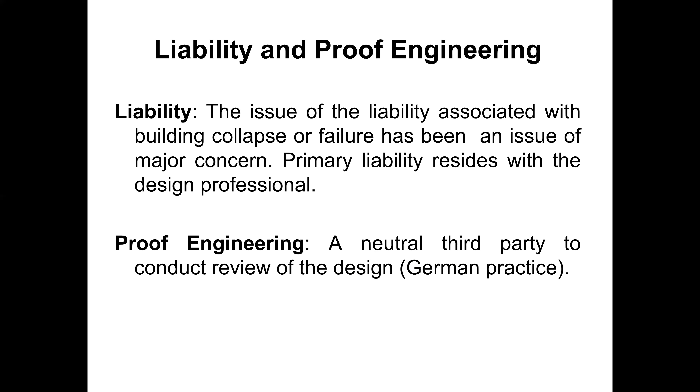Moving forward, the next heading in the book is project concept and need, or project development. We start civil engineering projects if there is a need. After the need, we prepare the conceptual design, the model or architectural design. The conceptual design should be ready, agreed and approved. Then we move forward with the preliminary or detailed design of elements.

First we should agree on the architectural design: if it's a high-rise building, how many stories, say an 80-story building, how it looks, whether it's a concrete or steel structure. If it's a bridge or interchange, how it will look, whether it's a box structure or I-girders. The main things should be decided. Once we have approval of the conceptual design, we start the detailed, final design.

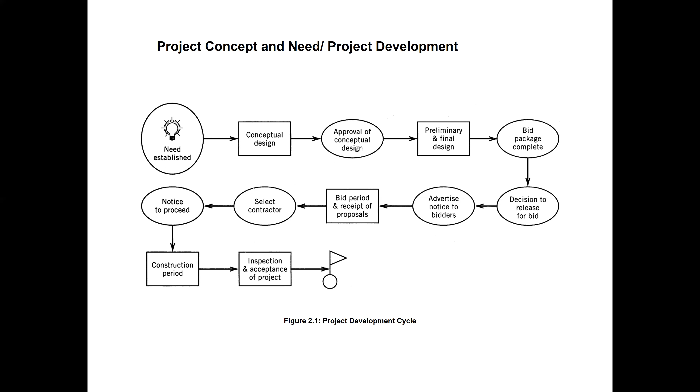This is like a project concept and need and project development cycle. Okay, so we will move forward with the next slide. So now this is the definition they have put for the drawings.

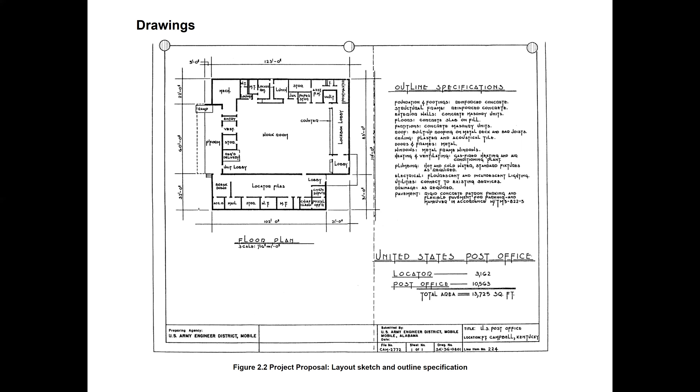So here, you have studied the courses AutoCAD and drawing, so you are familiar with the drawing. This is just a sample of a layout sketch and outline specification on a drawing. Okay, so you are familiar with the drawings. Next is the estimate. On the estimate, we will study a separate chapter on estimation.

But here is just to give you some idea: an estimate is a calculation of the quantities of work and their expenses. The total probable expenses to be incurred on the work is known as estimated cost of the work. The estimated cost is a close approximation of its actual cost. So we prepare the project estimate.

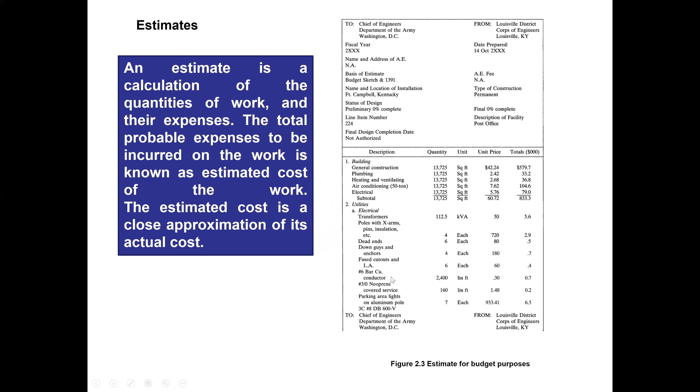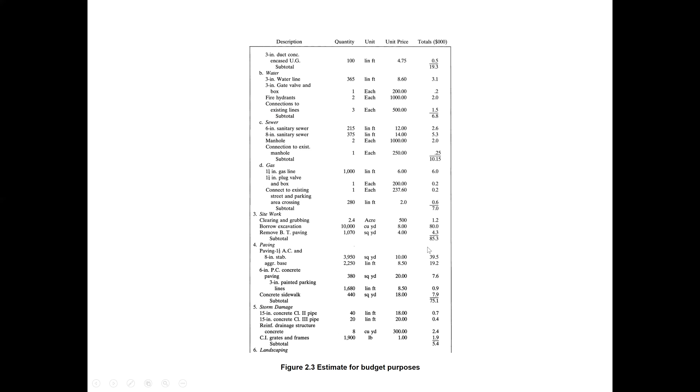So usually we have serial number and item description, and we take out the quantity takeoff. So how much quantity for each, what are the units for each quantity, and then how much is the unit price and total price. Here you have utilities, cost for sewer, for gas, for site work, for paving, for concrete work, for landscaping. This is description, quantity, unit price, and total price.

Communication. There is a design related cost. So this is just to let you know about the bill of quantities or the estimate. Inshallah there will be another separate chapter in which we will prepare an estimate in detail, so you will understand. But here it is just to let you understand that there is an estimate. This is approximate. For every project we will prepare the estimate.

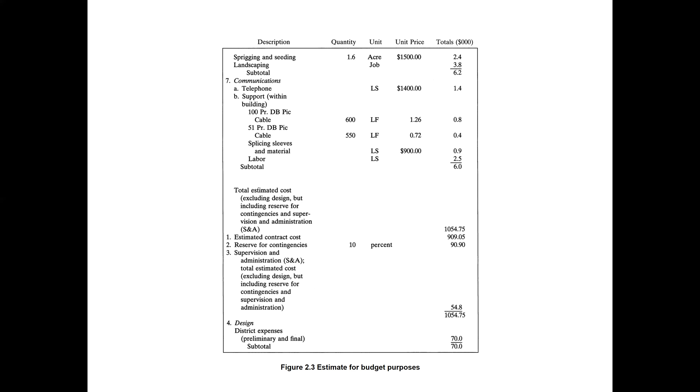There are different types of estimate, but this you can say is the bidding estimate for the project. The contractors, when they submit the bid, prepare this estimate and the total price of the project. When they put the unit price and total price, they add up at the end and get the project price. So in the next slide they put notice to bidders.

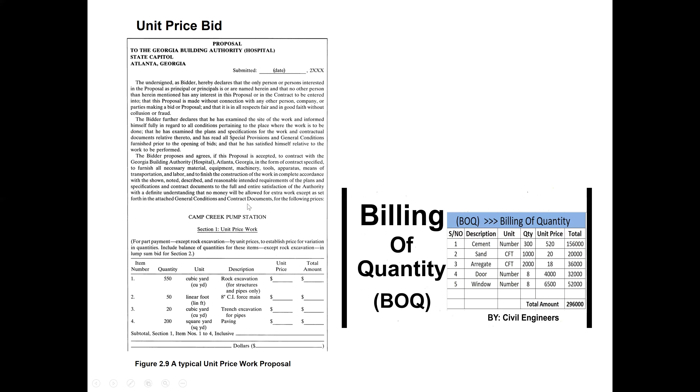So the unit price is given, then multiply the unit price with the quantity to get the total price, and then add up all the totals and it becomes the project cost. By this way, we are going to have the bid price. So let's move forward and come back to the bid package. We are going to discuss general conditions.

So general conditions define each contracting party's duties and rights, and the rules by which they are to meet obligations and perform the work they agreed upon. Okay. General conditions is like a book; some people call it the Bible. It's a book that we will follow for any time extension, anything in the project.

We will have to go back to the general conditions and supplementary conditions to see what the contract says, in case of conflict, increase in time, increase in prices or change in contract documents. For everything we have to go back to this book. This book gives the duties and rights of the parties, and the rules and regulations for how they have to complete the contract. Now, this was done by the EJCDC.

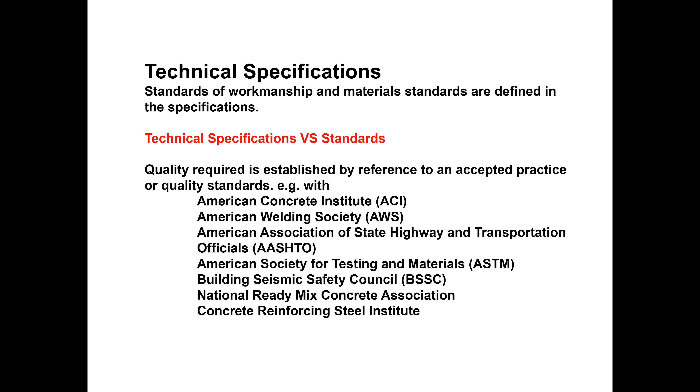Next is the word addenda. Document or information attached or added to clarify, modify, or support the information in the original documents. An addendum issued by a client during the bidding process becomes part of the contract document when the contract is awarded. It could be addendum number 1, 2, 3, 4, 5. On the first day, the consultant or the owner issues the contract document to different construction companies for the preparation of the bid.

Those contractors take those documents back to their company, study them in detail, and point out if there is any mistake in the contract documents. If there is any mistake, they will contact the consultant. The consultant will issue addenda or revised drawings to all the contractors who got those documents, so that every contractor has the same document, from the first date of issuing the document until bid submission.

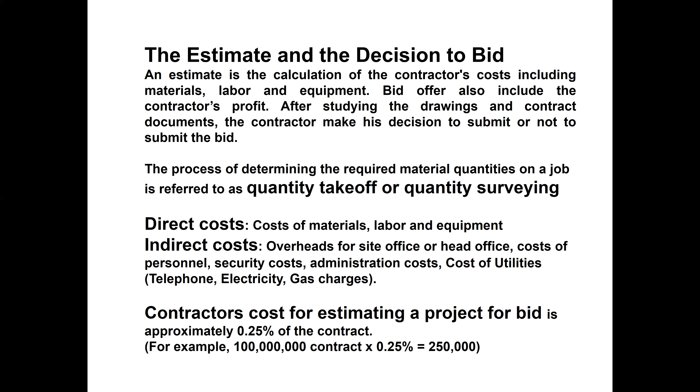With this we will move forward to the next slide. Here just a couple of things. With a bid bond, there are 3 parties: the owner, the contractor, and the surety company or bonding company who provides the bond. There are usually 3 kinds of bonds: bid bond, performance bond, and payment bond. Every contractor has to submit these bonds to the owner.

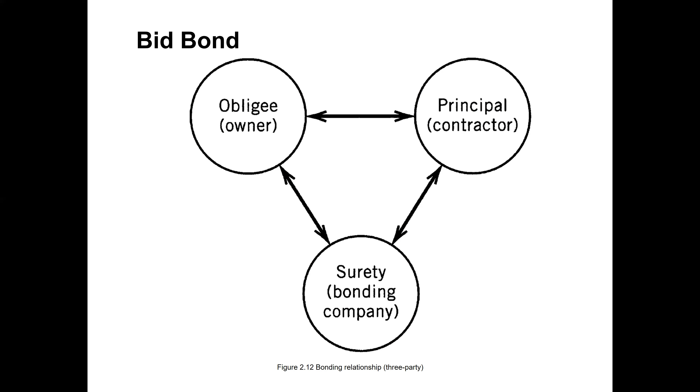In the USA, these bonds are issued by surety companies, bonding companies. But in Saudi Arabia and other countries, if there are no surety companies backed by the Ministry of Finance, then commercial banks can provide bonds for the contractor. Like here in Riyadh, you have Al Rajhi Bank, Riyadh Bank, Samba Bank, or many other banks. These commercial banks can issue bonds for you, and then you can submit those bonds. So let's study these bonds.

Just some definitions. A bid bond is submitted by the contractor to the owner to provide guarantees that the winning bidder will undertake the contract under the terms at which they bid. The cash deposit is subject to full or partial forfeiture if the winning contractor fails to either execute the contract or provide the required performance and/or payment bond.

So now see the bid bond. When the contractor submits the bid, they also submit the bid bond as a guarantee that they have prepared the bid according to the contract documents, and if they are the lowest, they will be ready to sign the contract. They will arrange a performance bond, payment bond, or insurance, whatever the requirements of the contract, and move forward with the owner to build the project.

So this is the bid bond. Owners usually ask for bid bonds because they have given 3 months, or 60 or 90 days, for the bid submission process. So they don't want the lowest contractor to not be ready to sign.

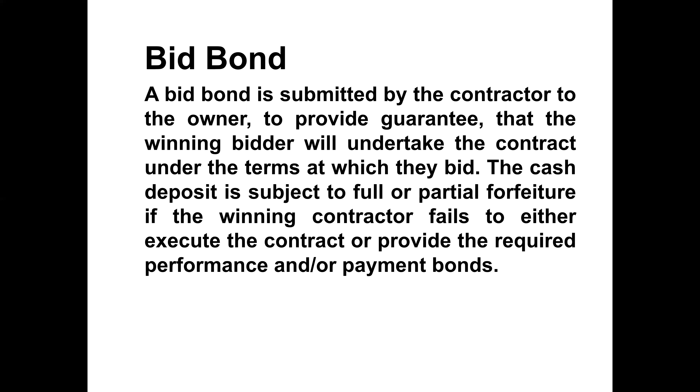So to build the project, or they don't have a number of equipment or engineers. So they don't have the capacity to execute the project. Okay, so this is necessary. Usually, owners want contractors to submit the bid bond when they submit the bid, so that it will be like a guarantee that if they win the project, they will be ready to sign the contract and complete the project according to the contract and specifications.

So now the performance bond. The winning contractor, like the lowest bidder, will arrange the performance bond. So we will read first. A performance bond is a surety bond issued by an insurance company or a bank to guarantee satisfactory completion of a project by the contractor. The winning contractor will arrange and submit this bond to the owner, covering the total amount of the project to ensure his performance.

Usually the winning contractor, or the lowest bidder with whom the owner is ready to sign the contract, will be asked by the owner to submit the performance bond for the entire amount of the project, that they will keep their performance good and continue to build the project according to the contract and specifications. So this will be a guarantee from the contractor during the construction period.

And usually when they arrange the performance bond and the insurance, they submit the insurance and performance bond, then the owner is ready to sign the contract and they will return their bid bond. After signing the contract, they will release or return their bid bond. The bid bond will be returned for the successful bidder and for the unsuccessful bidders also.